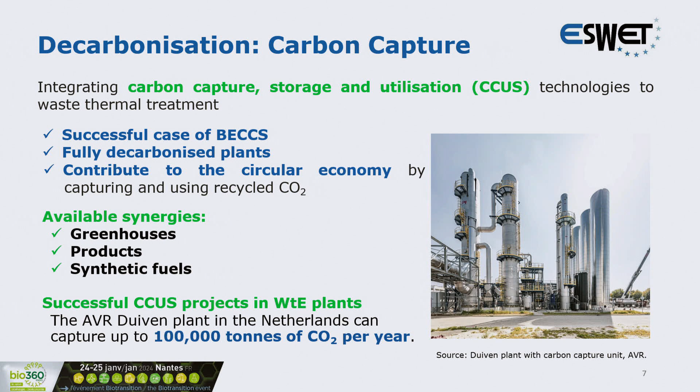Currently, all around Europe, there are more or less 70 projects focusing on CC and CCU that are ready to become operational starting by 2030. We will hear about that later.

There are two important projects that are already delivering on their commitment: the Porthos and the Northern Lights projects. Probably you already heard about them.

Something very positive is the fact that during the last CCUS forum in Denmark, the European Commission announced that 14 CO2 transport and storage projects will be in the new list of projects of common interest and mutual interest. So this is a very good signal for the sector, for the industry and for this technology.

But some latest projections show that we are not very on track when it comes to the achievement of our climate goals in Europe and globally.

That means that we really need to foster the deployment of this technology and accelerate the development of a very strong European CO2 transport and storage infrastructure.

We need a harmonized policy framework that works for industry and includes faster permitting procedures and less administrative burdens. On top of that, we of course need private and public incentives.

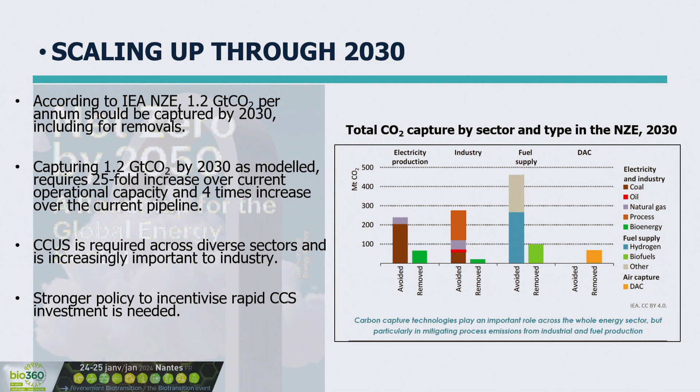I noticed that waste is not really on there. Antonella, you touched upon the need for recycling and waste, and then we end up with some other emissions left over. In the context of all the other industries, waste is probably a significant opportunity that somehow struggles with scale, so there's inevitably a high need for CCS there. The barrier for entry is probably a challenge for many facilities around the world. Just wanted to make a mention of that.

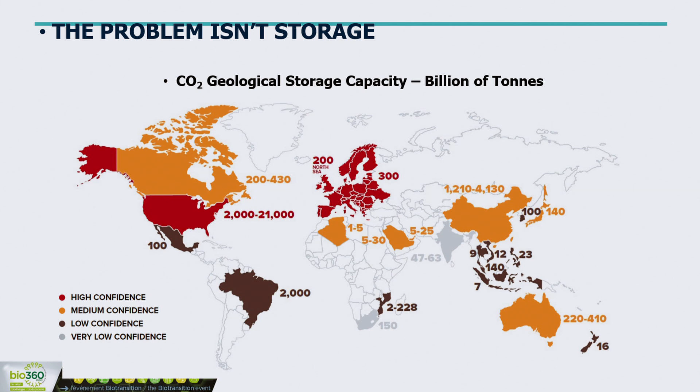Here is a slide showing storage around the world, potential storage for CO2 in various geological sites. The point of this is to show that, since we often hear, is there enough storage in Europe, is there enough storage around the world for CCS, there's plenty of storage, billions and billions of tons of it. So storage is not an issue. Probably good to get that out of the way as well.

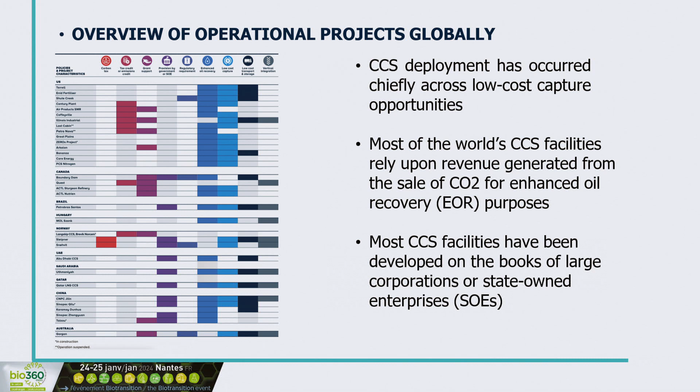They rely on revenue from EOR, enhanced oil recovery, and in terms of financing, they've all been invested in by large organizations that can afford to pay for them off their books. So you can hopefully see where I'm going, which is to try to get to the opposite of this. But this proves that if there's a business case and the risks are sufficiently understood, CCS does happen and can be deployed.

So we believe that government is best placed to address or manage these risks. From a policy perspective for revenue, it's important that government assigns a sufficient value on the CO2 that is to be captured, transported, and stored, so then there's a business case for it.

The cross-chain risk has to do with the interdependency, both from the project development phase through operation, between the capture facility, transport, and storage sites, being that if one of them goes offline, then there's nowhere for the CO2 to go or to come from. So that needs to be addressed. Typically here, I've just mentioned hubs and clusters. I'll see if there's time to touch upon this later.

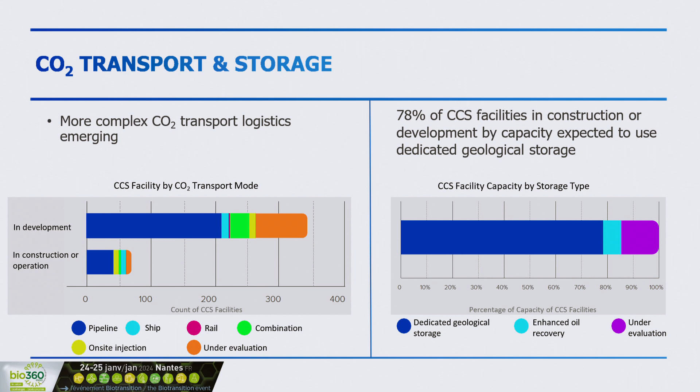On the left you see all the various modes of transportation. Pipeline is still the dominant one, but we're starting to see increasing interest in things like rail, for example, or shipping as well, especially in Europe. So that's quite interesting.

Networks reduce cross-chain risk and give you benefits of economies of scale. They allow clusters to develop. When thinking about waste and scale, one of the barriers to implementing CCS in waste-to-energy plants is scale. Networks allow you to overcome that to some extent because you're partnering with other entities, sharing the cost of transport and storage.

In summary, we've got the Net Zero Industry Act from the EU and the CCUS strategy in place. I've even seen literature discussing CCS and waste-to-energy and the need for it once all recycling targets are met. We see Netherlands, Denmark, and the UK progressing their policies and projects. Incidentally, in the UK last week DRAX was approved—that made the news, and it's exciting because it's the first BECCS project in the world of that size. Very promising signs.

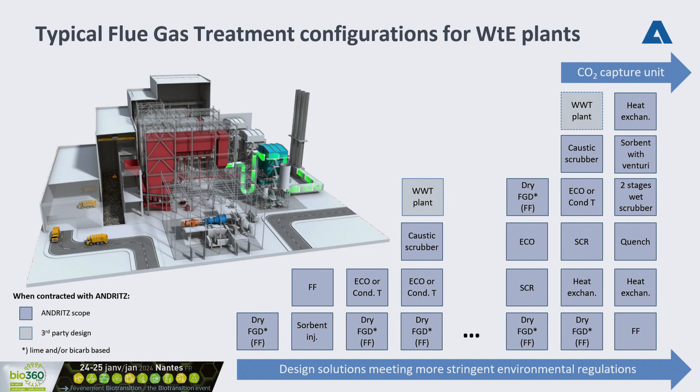So it's going to be an analysis to be done, which is to some extent a case-to-case analysis. We cannot have one solution fit them all. For that, there are a few questions which you should ask yourself.

For example, is your interest to capture CO2 on existing lines or on the new lines which you are planning? Which is your CO2 strategy? Do you wish to capture the entire quantity, or just the biogenic share to be able to value it as e-fuel? And then, very important - and I think this is where there are still some questions, and we hope legislation will now progress quickly in Europe - is where to go with the CO2.

For sure, the capture of CO2 of a few tons maybe per day are possible, because you can still treat the CO2, transform it - eventually you have a kind of storage area which has a limited permit for that amount. But when we start speaking about 100 or 1,000 tons a day, then you really have a logistic element to consider for the CO2 transportation and storage, and that really needs to be addressed.

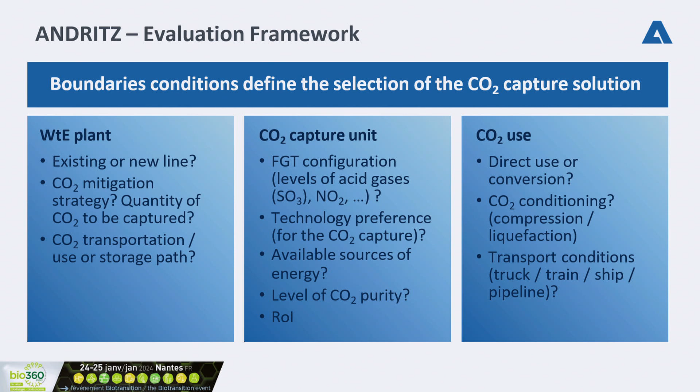And then, of course, it's at the end a point of return on investment that needs to work. And then, of course, if you don't have the possibility to store it, the point of using the CO2, converting it into a valuable fuel, I think it's a big opportunity here for the waste-to-energy operators, especially in terms of taking the biogenic share of the CO2. I think that's it for this slide.

When it comes to energy consumption, there is a big element here. It takes a few gigajoules per ton of CO2 to capture the CO2. Of course, the integration into the heat cycle of the plant is going to be a winning concept.

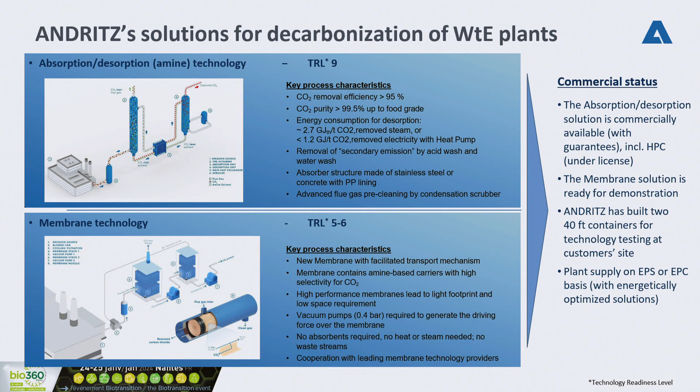Voilà, I think that's what I wanted to say about these options. Now let me come to this slide. If today you are considering building a new line and want it CCS-ready, this would typically be the flue gas line we would recommend prior to the CO2 capture unit, because such a line will enable you to directly install the CO2 capture unit and separate the CO2.

So typically here we would have a first flue gas treatment based on semi-dry sorption with hydrated lime, where we would do a first elimination and abatement of the acid gas, as well as with active carbon we would take the heavy metals, dioxins and furans. Then we would go into the SCR to remove the NOx.

Most of the processes for CO2 capture are very sensitive to the concentration of NO2. NO is not so much an issue, but NO2 can be tricky. Then we would go into a second stage of pre-scrubber and caustic scrubber before recuperating the energy in the flue gas condenser.

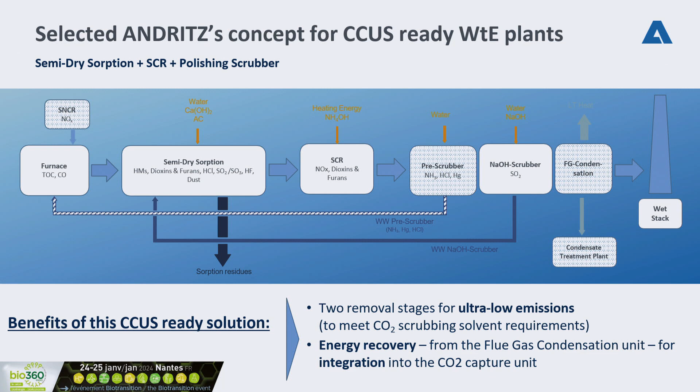Voilà, I think I'm coming to the end of the short presentation. We'll take questions at the end.

But today, especially when looking at technology based on the absorption-desorption concept, there are possibilities to implement it at plants. Should your company not be ready with one or the other concept, most technology providers offer mobile applications where you can test one solvent or technology before going to very large plants removing a few hundred, 100,000 tons a year, or even higher quantities.

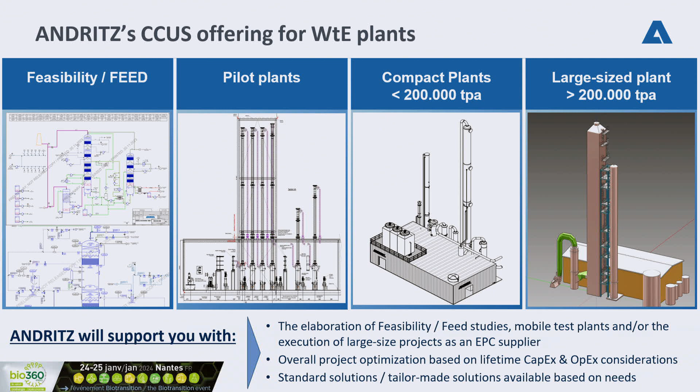I think that was the last slide I had, and I thank you for your attention.

Thank you. It works. Good. So I have an immediate question for you, and then we can pick more questions after all the presentations.

I would like to know if you can give us an order of magnitude of the percentage of energy used to regenerate the amine, or more generally to capture the carbon.

Yes, that's certainly an important element to size the installation, and also to determine the cost of operation. What we have seen, depending on the type of solvent used, we see values between - I had in my slide - 2.7, 2.5, up to 3. I have seen even 3.3 gigajoules per ton of CO2 captured.

So I'm maybe not expressing that in percentage, but in numbers. Now, this energy is the energy needed for the desorption, so to say. Of course, the absorption mechanism is exothermic, so we recuperate some of this heat and integrate it into the entire system.

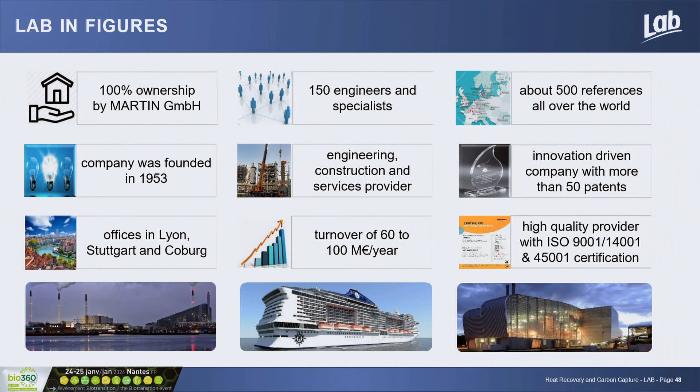Our main activity is flue gas treatment for several applications. The main one is waste to energy, but we are also working on biomass to energy plants, as well as sludge incineration. We have developed in the last years this flue gas condensation system for transfer of heat to the district heating and to increase plant efficiencies. We also have an activity for the marine sector, where we deliver a system for desulfurization as well as a catalytic system for NOx removal.

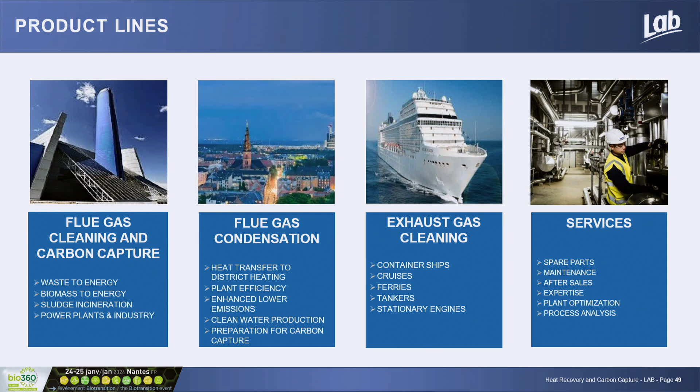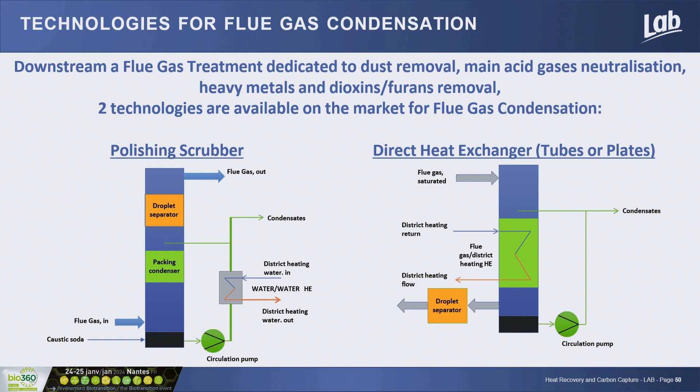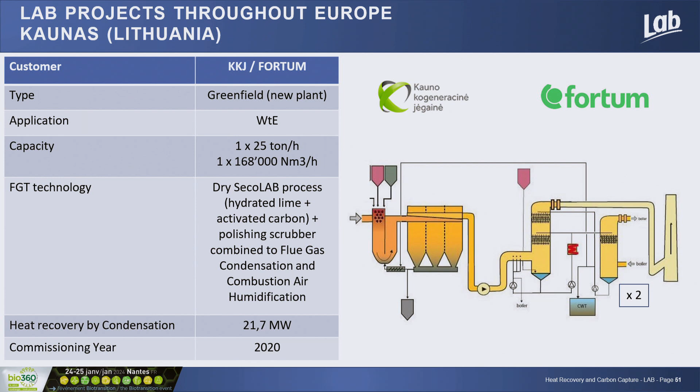So you have some technical figures on the slide, I don't think I need to repeat them. Some photos of the plant - it's always nice to see the sun shining in Lithuania. As you can see, it's a complete outdoor flue gas treatment installation. On the right side, you have the size of the condenser - I think it's 30 to 35 meters in height.

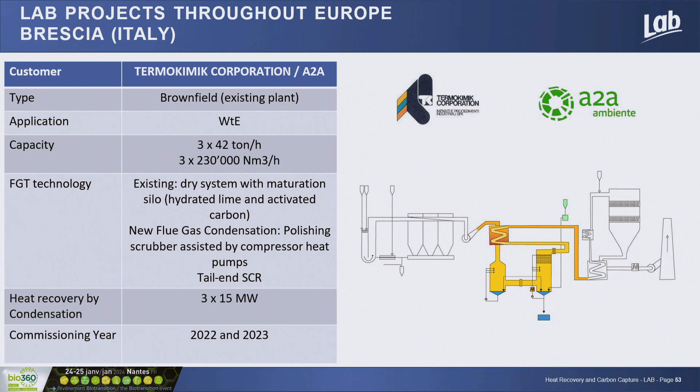Second example is Brescia, in north of Italy. The city of Brescia has a long history of district heating network within the city. This project was a brownfield project, meaning the plant has been existing for, I think, 20 years. The flue gas treatment was a dry system with a maturation silo. A2A decided, in order to lower emissions and fulfill the new BREF BAT requirements, to install downstream of the existing dry system a condensation unit with polishing scrubber technology, connected to a compressor heat pump, and also downstream an SCR system, on their 3 existing lines of 42 tons per hour each. So it's quite a big plant.

Last example is the city of Hamburg, Borsigstraße, in Germany. Also an existing plant where we have installed 3 condensation units, 2 on the existing waste-to-energy line and 1 on a biomass line. Here the technology was different - it's a plate heat exchanger, as I presented before. And what's interesting is it's in 2 steps. The first step is a direct connection, shown at the top of the sketch, a direct connection of the heat to the district heating. And the second one is a connection to an absorption heat pump that we deliver as well, in order to really optimize.

I broke it, no? Hello?

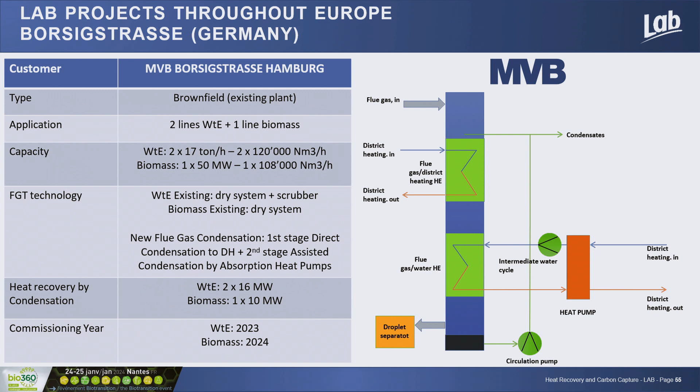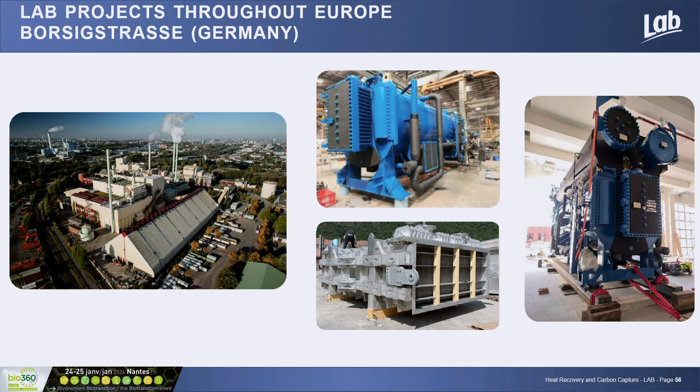Yes. And the second stage connected to absorption heat pump to really increase the heat recovery within the flue gas treatment. Some photo here, it's absorption heat pump. You can see the difference with the compressor shown before and the plate heat exchanger on the bottom.

So this is really interesting, and it is also preparing this flue gas condensation step for the future and the carbon capture unit. In lab, we are promoting for the carbon capture system conventional as presented by Alain as well, the amine solution with absorption, desorption. And we are working in the way that our main role in lab is flue gas treatment.

Our approach within lab is to offer solution within the waste-to-energy plant. We are not interested by transporting the carbon capture from the plant to the port or to somewhere, because this is not our job. We really focus on the waste-to-energy plant itself and on the flue gas treatment.

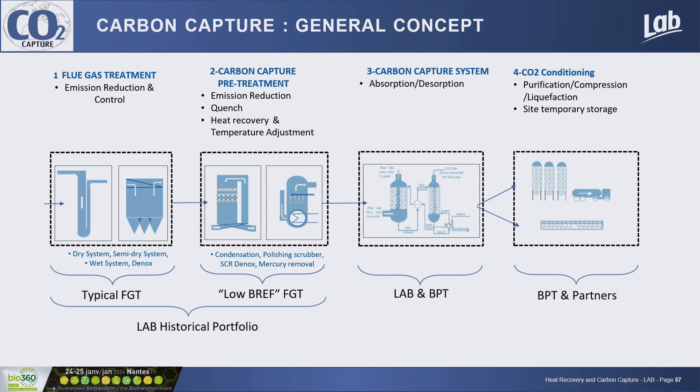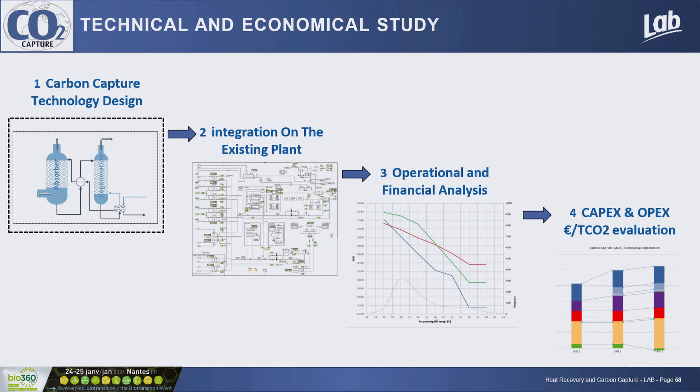So what we are offering to our customer is, at the time being, feasibility study with the design of the carbon capture unit, how it is integrated on the existing plant. Because the main issue for the carbon capture unit is, as you know, the heat which is requested to operate such a plant. And for that, we have really an adding value with our know-how on the flue gas treatment. And then we provide information at the end, which is the most important for our customer, about CapEx and OpEx evaluation.

Then we provide information. I think everybody is doing the same, but regarding the design, the PFD, PID, 3D modeling, arrangement, and so on.

So at the conclusion, we think that flue gas condensation is a must for increasing heat recovery within a waste-to-energy plant, and to achieve high performances on the emission, as I said before, the BREF emission limit. It prepares for the carbon capture unit because the flue gas condensation is conditioning the flue gas to the right temperature of the carbon capture unit and also to improve the low deterioration of the amine that will be used.

Carbon capture is feasible in a waste-to-energy plant. I think it will be the conclusion of today. And everybody agree on it. And it's already ongoing. You showed the example on the plant in Netherlands, existing plant, but there are several projects under development. And the most important, the most critical is really the heat integration, and it's where we see source of optimization and where we expect also to be present and to support our customer.

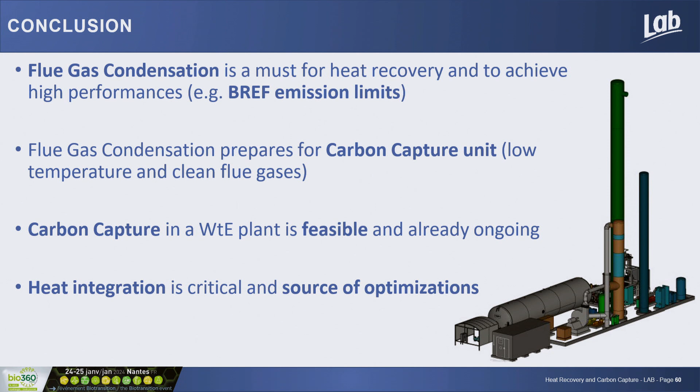Thank you, first of all. And in one of your slides, you mentioned that one of the main services that you provide to your client is information about CapEx and OpEx, an estimation of cost. Can you give us some more information maybe about that?

Difficult question for sure, but it's really depending on the available heat in the existing plant. Alain mentioned you may need to add a heat pump to find some alternative for the heat. I would say that till now, what we have done regarding the feasibility study, rough figures would be between 120, 150 euro per ton of CO2. Means regarding the capex for the new plant and the opex for 15, 20 years. It's the rough figure, but this is where we are at the moment. It should decrease in the future regarding the capex, maybe, but this is a rough estimation that we can say today. Okay, thank you very much.

But I will not sign. Okay, we will keep for ourselves then.

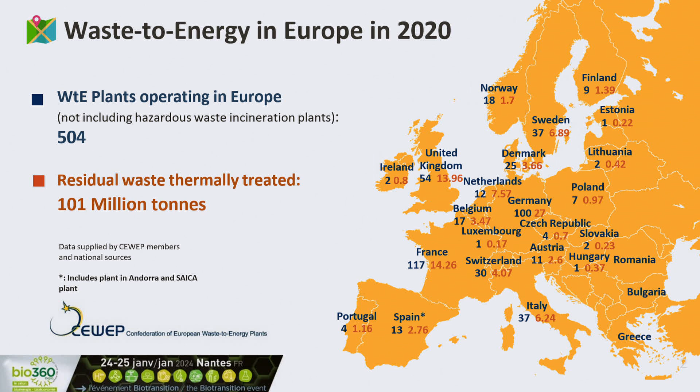In this slide you can see our evergreen map with the distribution of the plants in Europe. Two key numbers: we have 500 waste-to-energy plants treating about 100 million tons of residual non-recyclable waste every year. So just to remember what we do and why we are here today: even before talking about carbon capture, let's remember that we need waste-to-energy as a service to society, to treat safely all that residual waste that is not good enough for recycling.

And this is the essential task given by waste incineration facilities today. By doing so, circular economy and climate mitigation go hand in hand with waste-to-energy, because by thermally treating waste we also produce important quantities of electricity and heat that come back to our cities to power them. Just by doing so, we are already saving CO2 emissions because we are substituting some fossil fuels, reducing dependency on fossil fuels and saving an equivalent amount of CO2 emissions.

But in the future, I like to think of it not just as waste to energy, maybe we can call it waste to value, because not only energy can be recovered from our facilities, but also materials. For example, the bottom ash, the residues of the combustion process, can be sent to recycling activities, and this also saves CO2 emissions and raw materials. In the future, more and more, the other outlet that can be recovered is CO2 as a feedstock, for example to the chemical industry. So another good example of circular economy.

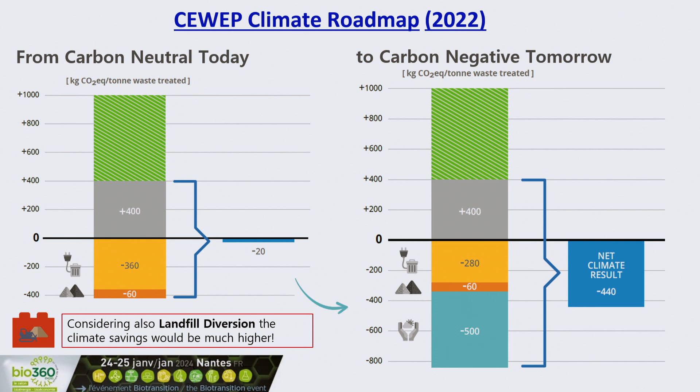I'm going to stop here. I'm not going to go into the numbers, but if you want, I was the leading author of this work. I have some copies with me today, and you can also find it online, so feel free to ask anything at the end.

So, another slide and a disclaimer, just for clarity. In terms of climate dictionary, we have to say something, because what I just showed, the climate roadmap, adopts a life cycle thinking. But there is a difference between talking about a climate saving or a climate reduction and carbon removal. A carbon removal is intended only when biogenic CO2 is captured and is either permanently stored into the ground as CCS, or is chemically bound into a long-lasting product permanently, with a CCU application as a mineralization opportunity.

And where is the potential of the waste-to-energy sector? As I said, about 60% of our emissions are biogenic, so if we capture them, we indeed have the potential to generate carbon removals. I've been around yesterday here in Nantes, and I heard a lot of interesting discussions about carbon removals and why they are needed, so maybe there's no need to say why we will need them.

But carbon removals are getting more and more interest because we have more and more companies—big companies like Google and Microsoft—interested in buying removals to offset their emissions or their historical emissions. But not only companies are interested in removals; the European Union itself will need carbon removals if we really want to achieve climate neutrality by 2050, because in 2050 we will still have some inevitable emissions that we will have to counterbalance with negative emissions. That's where the sector can play an important role and has a big opportunity.

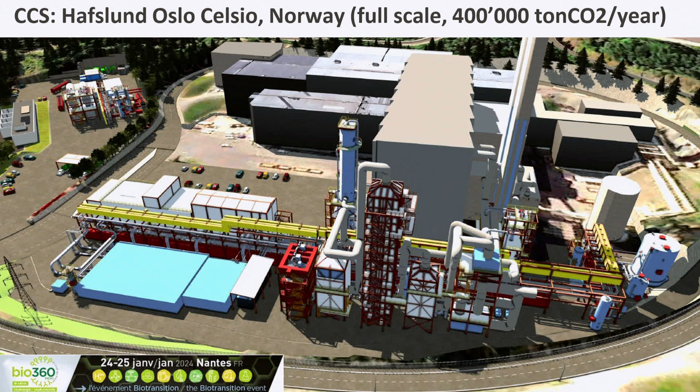Let's move then to the Netherlands.

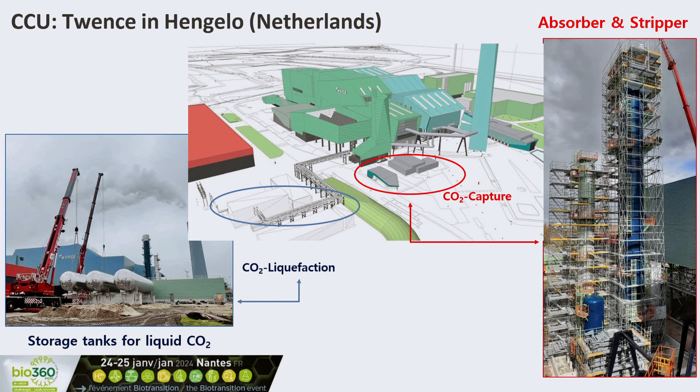So we move to the waste-to-energy plants of Twence in Hengelo, where you can see the development with the rendering of the absorber and the stripper on the right, and then on the left, the CO2 liquefaction units. I can tell you that's the other good news: the plant is pretty much done. This is a picture sent to me by my Dutch colleagues last year, and the plant is finalized, meant to start operation at the beginning of this year.

In Duiven, at Twence in Hengelo, at the beginning they will also capture and use CO2 in greenhouses, because, as I said, in the Netherlands they have a very good business case for the use of CO2 in greenhouses, which is also subsidized by the government. In fact, this project received support from the Dutch government through the SDE++ mechanism that was also mentioned by Dominic.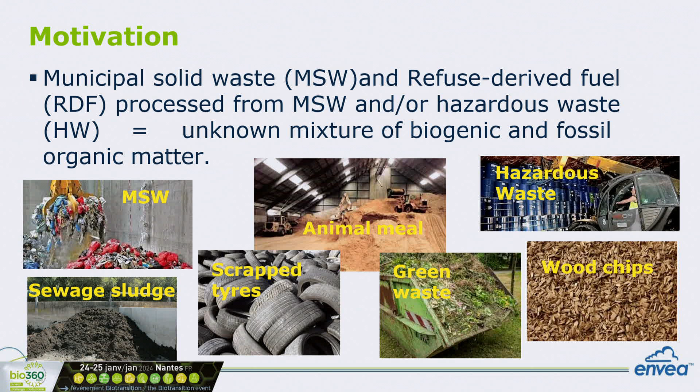Which is, let's say, greenhouse gas neutral, or defined as greenhouse gas neutral, and for that it's not necessary to buy or apply for emission trading certificates. If you look at the emission trading regulations in Europe, as mentioned before, the biogenic part is seen as greenhouse gas neutral. The reason for that is if we burn biomass, then the CO2 which is released is the CO2 which the plant, the tree, or whatever, was absorbing in the years before.

So it's not like the greenhouse gas effect started with industrialization. I always say in the Stone Age we already had CO2 emissions, but at that time it was all biogenic. The greenhouse gas effect and climate change really started with industrialization, when more and more oil, natural gas, and fossil materials like coal were burned. So that's the idea behind the biogenic fraction of CO2 emissions being greenhouse gas neutral.

Beside our European regulation, we now also have different domestic regulations. For example, in Germany we have our Fuel Trading Act - in German, Brennstoffemissionshandelsgesetz. This has been in force for a couple of years, and up to now it covers the burning of fuel like gasoline, coal, and other fossil fuels. We also have to pay for that privately. Due to that, for example, our gasoline got more expensive, as did natural gas for heating houses.

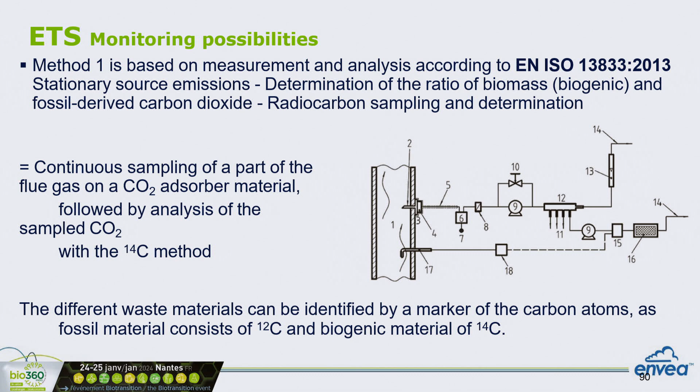So how is the functional principle of the system we provide on the market? It's a volume proportional extraction of a part of the flue gas via a heated sampling probe and a sampling line. We have the adsorption of the CO2 on an adsorption trap filled with ascarite, that's mentioned in the 13833

or soda lime. I have to say we get better results and better experiments with soda lime, so normally we use this today.

Sampling periods could be from several hours up to 1 month, so there we come to the continuous sampling, and this means if you sample 1 year and you analyze these cartridges, at the end you will have 12 analytical results. So that means you have to pay for 12 analyses.

So these are, let's say, a part of the operating costs, but it's quite helpful. And the sampling principle fulfills all the requirements which are mentioned in the ISO 13833.

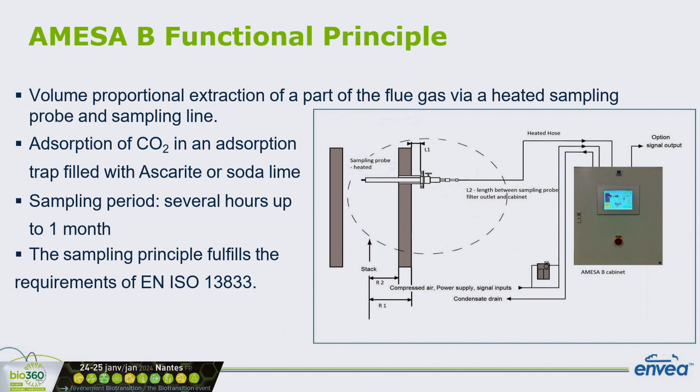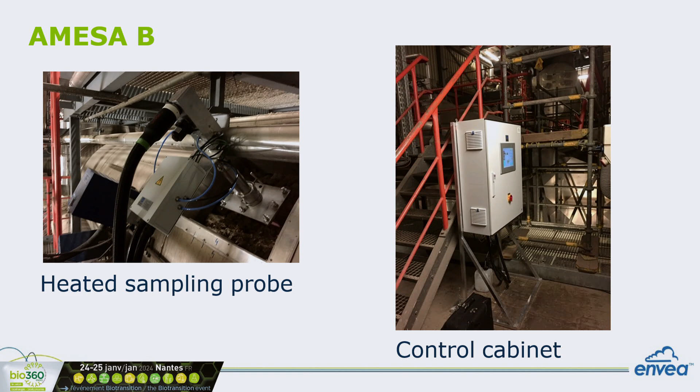Here you can see on the left picture on a horizontal duct the installation of the heated probe, followed by the heated line, and on the right side you see the cabinet, so it's a possible wall-mounted cabinet with an integrated touch panel for operation. So it's quite easy to handle with that.

We have integrated there all our experiences. The ones who know our company, we are active in the meantime around 25 years in continuous dioxin sampling, and since around 14, 15 years in continuous mercury sampling. So we know quite well what we have to consider if we want to have such an automatic long-term sampling.

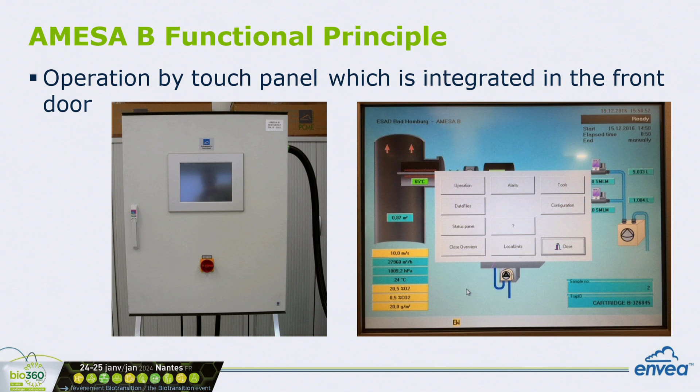So I show here results from the project in France, which was also supported by the French environmental agency ADEME, also fnade, Cabinet Merlin, and we provided the sampler. By this project, and it's also available for download, so it's free.

There was done the determination of the biogenic CO2 content and green energy over 1 year in 10 municipal waste incinerators here in France and 1 refuse-derived fuel plant. The amount of the waste burned in these plants corresponds to around 10% of the total amount of waste which is burned here in France per year.

For MassBio, Cabinet Merlin has a software called MASSBIO2. It's a patented method for calculating the biogenic and fossil mass fraction of the fuel and for calculating the green energy.

And during this program, there were taken 148 samples from these 10 waste-to-energy plants and 10 samples from the RDF plants. So you can see there is quite a lot of statistics behind already. And so this could give quite good statistical data.

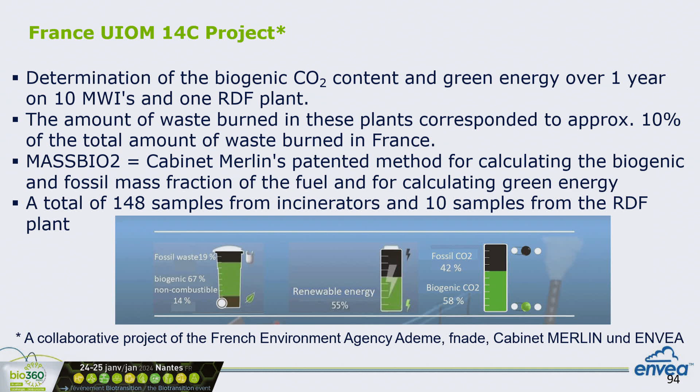If we look on that, there are also the requests in the European Union to increase the quantity of green energy. So for that it's also important to know how much green energy is generated by waste-to-energy application.

Another interesting result we have is from a municipal waste incinerator in a Mediterranean tourist place. These are results of a multi-year monitoring. If you look on the scale, we started in 2017, so this is something already done for several years. The application of this method is not relatively new.

This incinerator has 2 lines, and partly also incinerates sewage sludge. There's no permanent operation of both lines. The reason is that, as I mentioned, it's in a tourist place, and during summertime there are quite more people, so a higher incineration capacity is needed compared to wintertime when there are fewer people around.

If we look at the biogenic content, the averages were 65.9% in line 1 and 66.5% in line 2, so it fits quite well. We should expect that. But there's a trend of higher biogenic fraction in winter and lower in summertime.

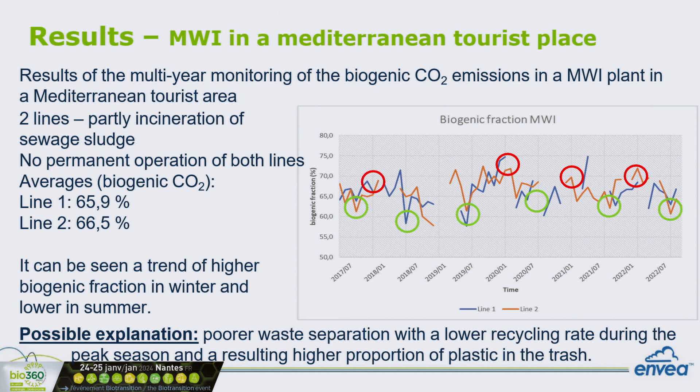So each time the place is full, the fossil content is higher. We expect that during high seasons, when there are a lot of tourists, waste separation and collecting is quite different from wintertime. This means more plastics end up in the waste in summertime, lowering the biogenic content. It's quite interesting - it varies really between 56 and more than 70% biogenic. So there are really high fluctuations, and to calculate that could be quite complex.

To come to a conclusion: the started action in the European Union to determine CO2 emissions in waste-to-energy plants from 2024 leads to the request for a simple and accurate measurement method for determining total and biogenic CO2 emissions. The application of ISO 13833 is surely one method which is quite easy to handle and which could give quite good results - it's an interesting tool.

The implementation of the emission trading system on waste-to-energy plants in several countries will help collect information and experience for the assessment by the European Commission in 2026, for a possible extension of the ETS to waste-to-energy plants. Thank you for your attention, and thanks for the possibility to talk here.

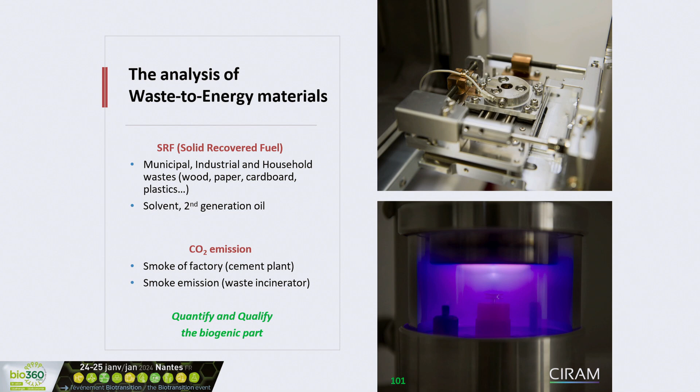There are two different ways to define sustainability. On one hand, you have the mass balance - I'm sure you know that. Mass balance uses a lot of criteria, such as professional training, respect of the law, the kind of storage, something like that. Very important things, yes, of course. But I didn't really understand the link between these criteria and sustainability.

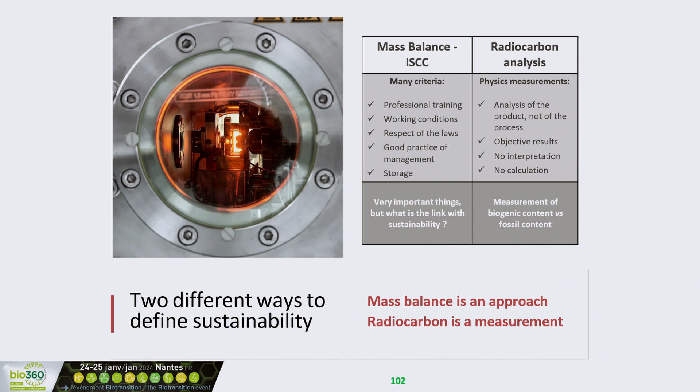On the other hand, you have the radiocarbon test, the C14 analysis. It is a physics measurement. So we analyze the product - we don't analyze the process. It is an objective result without interpretation, without calculation. So for me, mass balance is more an approach, when C14 is a physical measurement.

But how does this C14 work? In fact, C14 is present in all the atmosphere, in the CO2. C14 is a radioactive isotope of carbon. So C14 is present in all living organisms - it's present through respiration and photosynthesis.

Radioactive isotope means that C14 is unstable, which means with time it will transform. On the one hand, C14 decreases, but on the other hand, during life, C14 is reintegrated inside the organism by respiration and photosynthesis. So during life, there is a balance of C14.

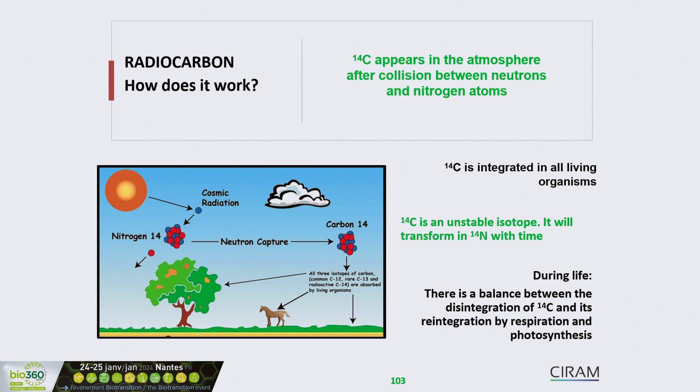From the death of the organism, there is no exchange with the atmosphere anymore. So C14 will decrease, decrease, and decrease, and after 60,000 years it will completely disappear. So the living being, the biomass, contains a full radiocarbon tank.

So we will talk about PMC, the percentage of modern carbon. That means that actual biomass contains 100% of modern carbon. At the opposite, petroleum comes from the degradation of organic compounds over a million years.

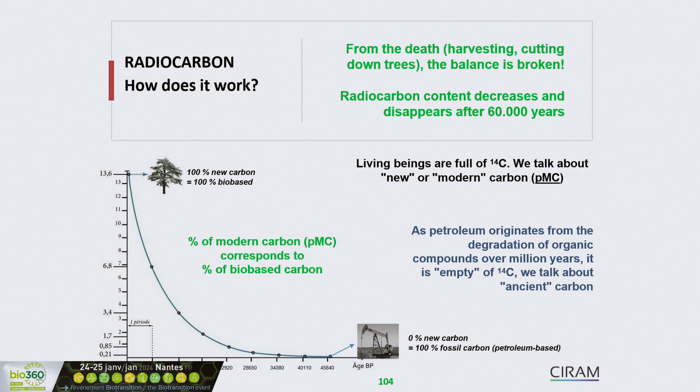So the petroleum doesn't contain C14 anymore. So the fossil compound doesn't contain C14 anymore. So if we quantify the percentage of modern carbon, we will quantify the percentage of bio-based carbon.

So you understood that with the C14 test you can quantify the bio-based carbon content, but it works on every kind of material - it works on solid, liquid, and gas. It is a blind test, we don't need to know the composition of the material, we only need to know if it contains carbon or not.

It is a routine technique, and we can analyze a lot of samples a week at CIRAM, between 100 and 150. The detection limit is very good, and we have a high precision, under 1%.

Of course, we use international standards which describe how to make this radiocarbon test - there are American standards and European ones also. An important thing: when we analyze 30 samples, at the same time we analyze 8 international reference materials to obtain the best quality analysis.

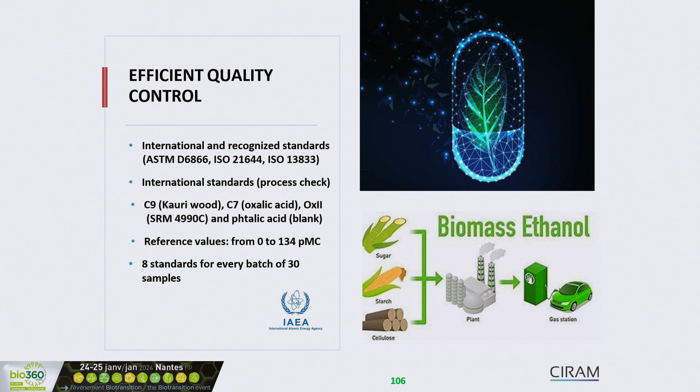So there are 2 solutions to use the C14 test in waste to energy. You can analyze the SRF to define the percentage of biogenic parts in your fuel. But you can also analyze the CO2 emission, and you will quantify the biogenic part content of the fuel and the combustive.

So you see that you can use the C14 test at every step of your process, and you can follow the carbon from the fuel to the emission.

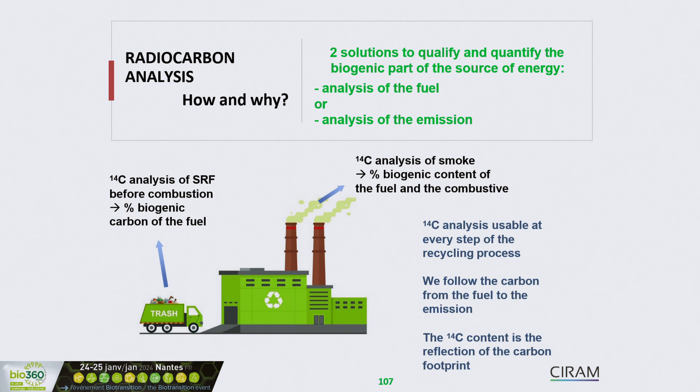A very important thing is the homogeneity and the representativity of the sample. Why? Because for the radiocarbon test, for the C14 analysis, we analyze a very small quantity of material - it represents tens of milligrams.

So you will understand that if we analyze the paper, the wood, or the plastic in this SRF, the quantification of the biogenic parts will be different. So for the SRF, we have to micronize, we have to homogenize the compound to have a result which is representative of the material.

And it's the same thing for the CO2 emission. As Jürgen explained to you, we can analyze gas, but if I take a sample for an hour, I think the result will be different than if I catch the CO2 for 1 month. So there exists a device to collect CO2 during 1 week or 1 month to obtain at the end a representative sample.

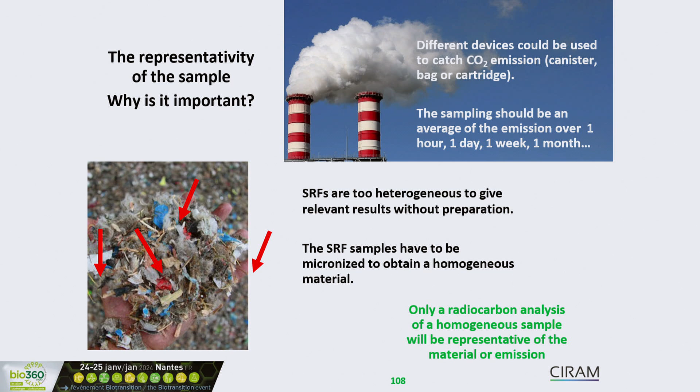I will also talk about stable isotope analysis. It could be very interesting to couple the C14 test with the stable isotope analysis.

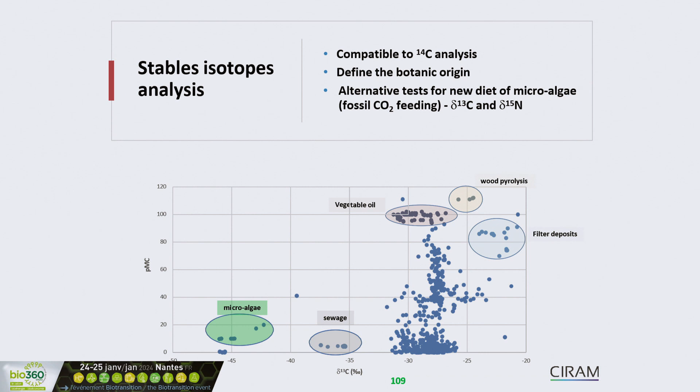Here you see on this graph that we can make the difference of the origin of the fuel, coupling radiocarbon and stable isotope of carbon. You can make the difference between vegetable oil, microalgae fuel, and wood pyrolysis.

To conclude, I hope that you understood that the C14 test is reliable, accurate, and fast analysis to quantify the biogenic parts of solids, liquids, and gas. And this C14 test is relevant at every stage, in fact, of your process.

The result that we give you is very easy to understand, even if you are not a scientist. But you saw that there was some subtlety about the homogeneity and representativity of the sample.